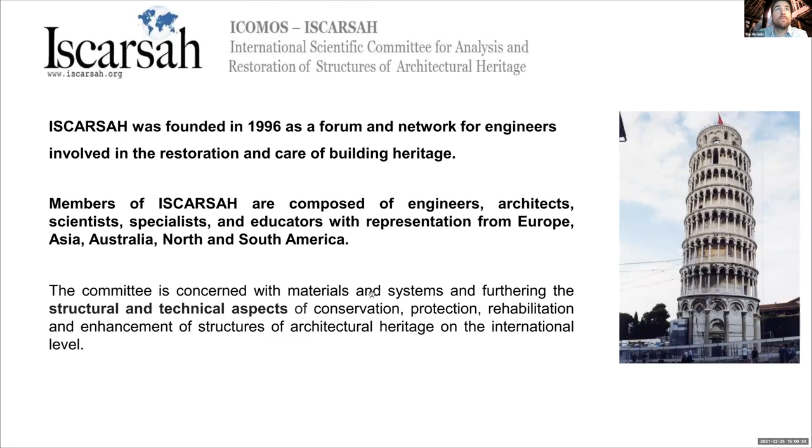We are an international group of engineers, architects, scientists, and educators dedicated to the restoration and care of built heritage. We mostly focus on the structural and technical aspects of conservation and architectural heritage. We have an elected board, many of whom are here with us today.

Our president, Gorun Arun, will be our first speaker. Our Secretary General, Tom Morrison, is as always working hard behind the scenes, letting people into the meeting room, monitoring the chat, and so on.

In the past years, ISCARSAH has published principles for the analysis, conservation, and structural restoration of architectural heritage. We publish newsletters as well. Currently, we are developing guidelines for the analysis and restoration of structures of architectural heritage.

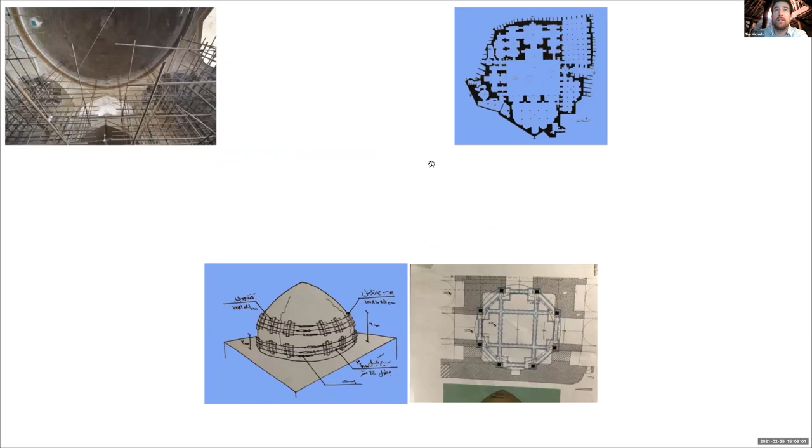And before the pandemic, we were organizing yearly workshops. The latest ones were in Korea, like this one, and Turkey. Here's some pictures of that workshop. And then the very last one was in October 2018 and was held in Iran. We look forward to continuing this once the pandemic is over.

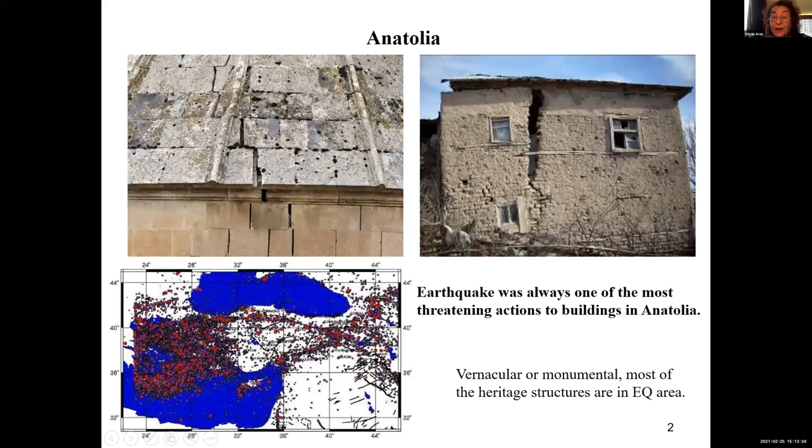Earthquake was and still is one of the most threatening actions to buildings in Anatolia. As you see here, vernacular or monumental, most of the heritage structures are in an earthquake area. In Anatolia, the main construction technology until the mid-20th century was timber and masonry. Above you see different types of timber structures, and below different types of masonry structures. In most places, due to scarcity of wood, masonry structures were built, and most historical heritage surviving to date is masonry construction.

The master builders of the past, when designing their buildings, were responsible for every aspect. They had to assume the roles of architect, civil and structural engineer, mechanical engineer, as well as city planner and contractor.

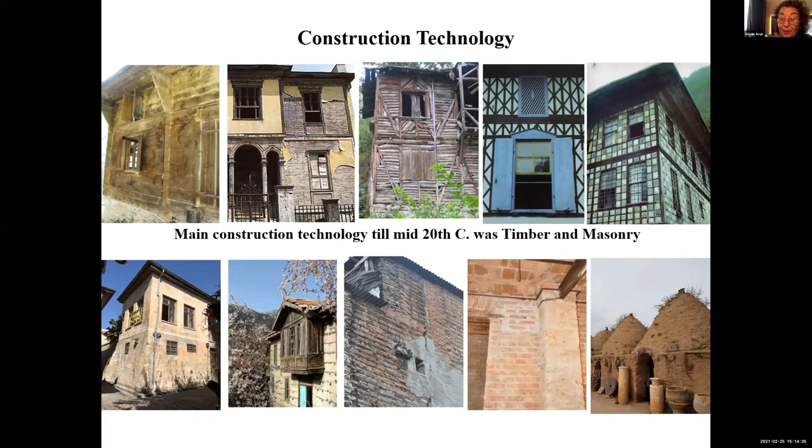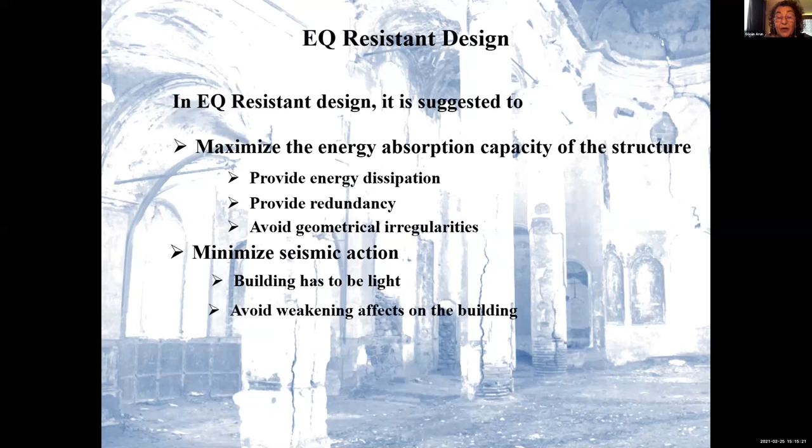Today we say earthquake resistant design is necessary to make a building safe. In earthquake resistant design, it is suggested to maximize the energy absorption capacity of the structure and minimize seismic action. To maximize energy absorption, energy dissipation has to be provided, redundancy has to be provided, and geometrical irregularities must be avoided. To minimize seismic action, the building has to be light, weakening effects must be avoided, and amplification of ground acceleration has to be minimized.

Building masters used techniques developed from previous cultures, their own trial and error, and techniques transferred from one generation to another. They were able to size and design their buildings, taking proper account of environmental conditions. Let's see how these demands are met by our master builders.

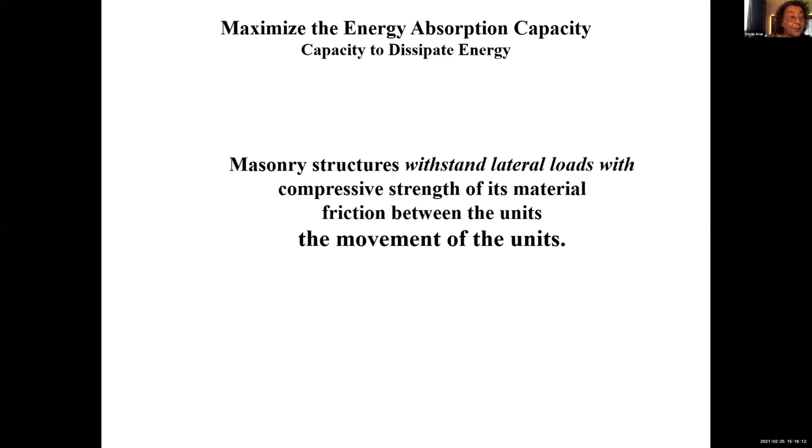To dissipate energy, masonry structures withstand lateral loads through the compressive strength of their material, friction between units, and the movement of units. The movement of units is important to disperse energy. In connecting stone units with each other, builders placed metal connectors in lead, a very soft material, so that it lets the units move under lateral loads to disperse energy.

If they used mortar to connect the units, they used weak rather than strong mortar, so that the units could slide along the bed joints under lateral loads and dissipate energy. Repair of the mortar is not so hard, but it keeps the main structural units intact.

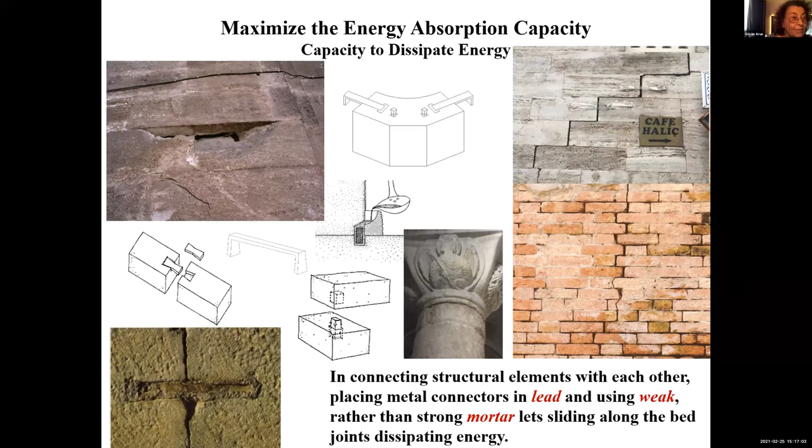Redundancy has to be provided. Redundancy of the structure depends on the nature of the structural system and the detailing of its elements. But masonry structures are inherently redundant structures.

Building masters knew that the physical dimensions of height-to-thickness ratio and length-to-thickness ratio of a wall are important factors in the seismic performance of masonry walls. They provided horizontal lacings that tied the outer faces of the walls. This prevents wall bulging under gravity loads and reduces the slenderness ratio of the wall. These lacings could be brick and stone, or metal in stone walls, and timber in brick, stone, or other walls.

They provided vertical supports at certain intervals along long walls. These could be cross walls and intersecting walls, or vertical ties of timber or stone buttresses.

To avoid geometrical irregularities, such as long projecting and differently weighted components of a building, buildings were separated by seismic joints. The building parts standing side by side were separated by not joining the masonry units to each other, and the foundations were also separated.

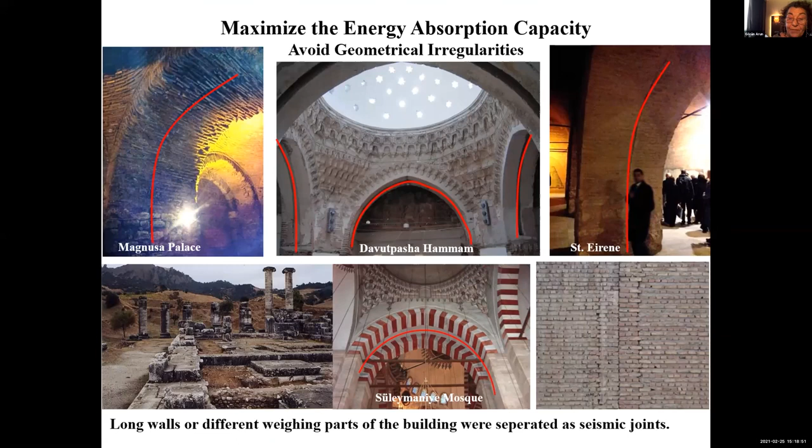To minimize earthquake effect, building has to be light. But masonry is heavy construction. The only way to reduce the weight of the structure was to make light roof and floors. In places where there's no wood, masonry walls and domes were built to span the plan areas. The building masters, knowing the geometry and behavior of the walls and domes, used clay pipes in the area of compression to reduce the weight.

To construct a flat roof over these domes or walls, between the flat roof or floor and the wall, they emptied the space in between or used clay pipes or amphora to reduce the weight of the building.

Again, to make the building lighter, in multi-story buildings in seismic areas, structures were constructed getting gradually lighter at the upper floors, both with material and the thickness of the wall. For example, in this 3-floor building, the ground floor is masonry, the first floor is timber with brick infill.

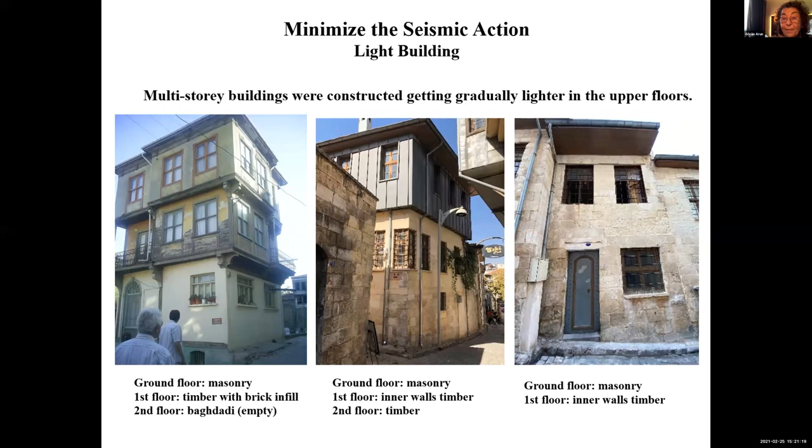To avoid weakening effects, water is a non-seismic threat to all kinds of buildings, timber or masonry. Depending on the porosity of the foundation construction material and soil characteristics, it can damage the wall and soil, eroding away portions and reducing the strength. Moisture in a building causes loss of material and weakens the structure in the long term. So water drainage was given high priority during design and construction.

To prevent instability of the building from underground water movement seasonally or daily, and to collect the surface water of rainfall, they designed an effective drainage system. The major components of this drainage system were wells or cisterns in the basement of the building, galleries or channels to discharge the water out of the building, and gates for ventilation.

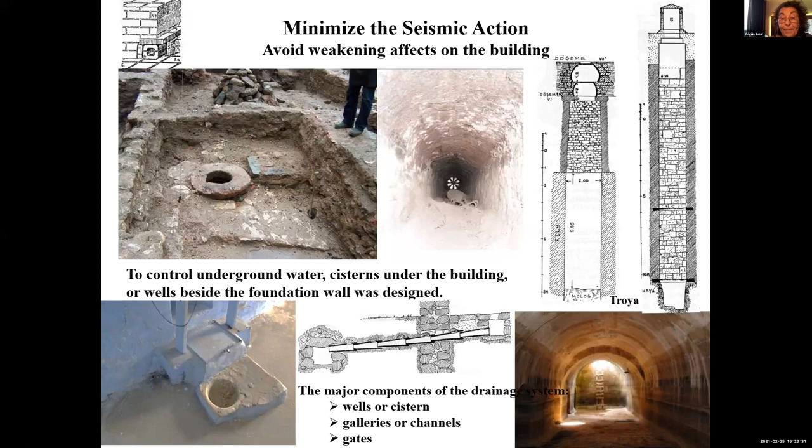Because this application is forgotten, when a new construction has to be built beside an old masonry or timber construction, it breaks the discharging system. Then the water starts to race to the building, weakening the material and softening the soil, which leads to the foundation settlement of the building.

To minimize amplification of ground acceleration, it has to do with the design of the foundation. Usually, the soft soil was consolidated by timber piles. The timber piles were tied by a timber mesh embedded in porous mortar. The foundation walls rested on this platform.

The foundations of masonry or timber buildings were of masonry. The thick foundations were generally a vertical wall in the soil. As the wall thicknesses became thinner, the foundation walls widened at the foot. If the wall was composed of closely spaced piers, and there was no sufficient depth to step the foundation, an inverted arch or vault was made.

Master builders knew that the acceleration generated by ground displacement is amplified or attenuated by soil structure. In high seismic zones, the building masters introduced special techniques in foundation construction to provide lateral stability.

If the rock bed or hard soil was deep, the foundation walls rested on a low layer of sand, gravel, or small stones. In masonry village houses in Anatolia, foundations were constructed over a layer of approximately 40 centimeters of sand until the 1960s, when reinforced concrete became popular in villages also.

If the rock bed was close to the surface, a flexible base was provided by placing single or more layers of wood foundation at the foundation base.

The foundation walls of the buildings in Üsküdar, you see, rest on grillage. Here, in the project of the inverted vault foundation of Edirne Kapı Cistern from the 19th century, you can see the timber grillage at the bottom. This foundation rests on 2 layers of timber grillage.

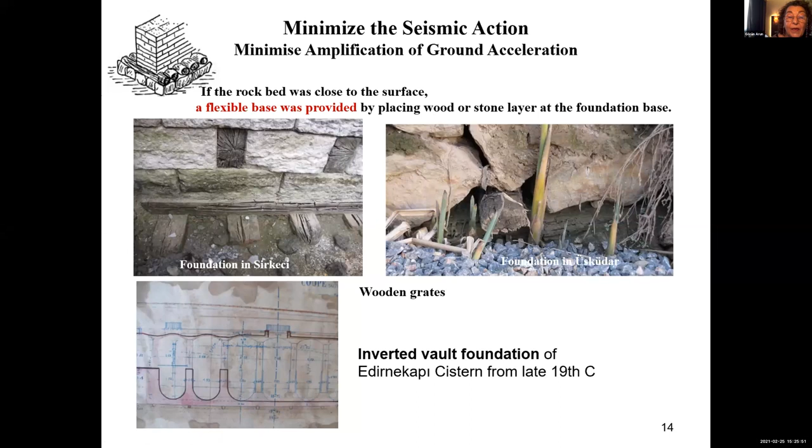If the rock bed was on the surface, the rock was carved in the form of a trough so that each stone of the foundation wall could be placed in the rock as if resting in a cradle. The big dressed stones of the wall rested on the high edges of the trough, not inside. The space in between was filled with briar, pieces of coal, or animal skin to reduce friction.

At the bottom, you see Malabadi Bridge in southeast Turkey. The piers of Malabadi Bridge rest on a lead layer.

A different foundation system practice was found during the octagonal tomb. Around this octagonal tomb, a 6 meter high, 2 meter thick wall at a 4 meter distance to the tomb was found, and it was in the shape of an octagon. This is because octagonal and hexagonal forms are not adequate forms for earthquake areas. So this buried wall acted as a retaining wall to absorb the first shock of earthquake forces, and there is no damage in this octagonal tomb.

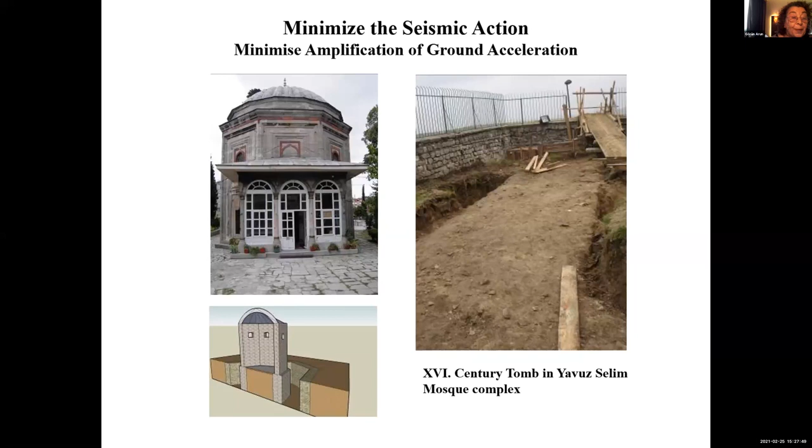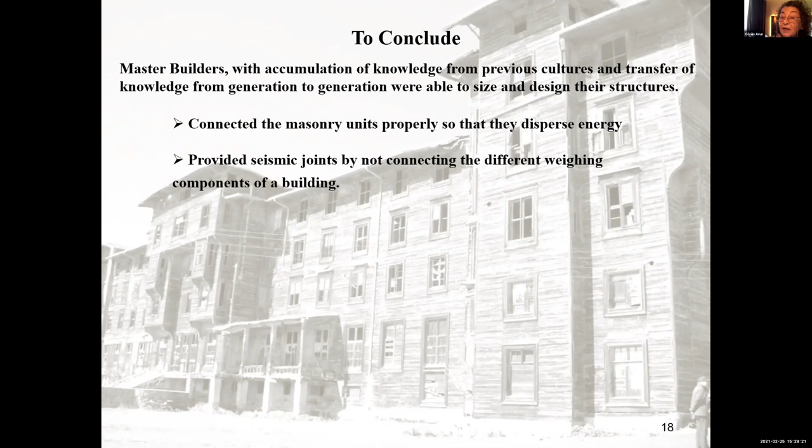To conclude, from previous cultures, their trial and error and transfer of knowledge from generation to generation were able to size and design their structures. They connected masonry units properly so that they disperse energy, provided seismic joints but by not connecting the different weighing components of a building. They had knowledge of geometry and behavior of structural elements. They used lighter construction material on upper floors to hold the center of gravity of the building close to grade. They designed an effective underground and surface water drainage system. In earthquake areas, they changed the natural frequency of soil or provided a flexible base.

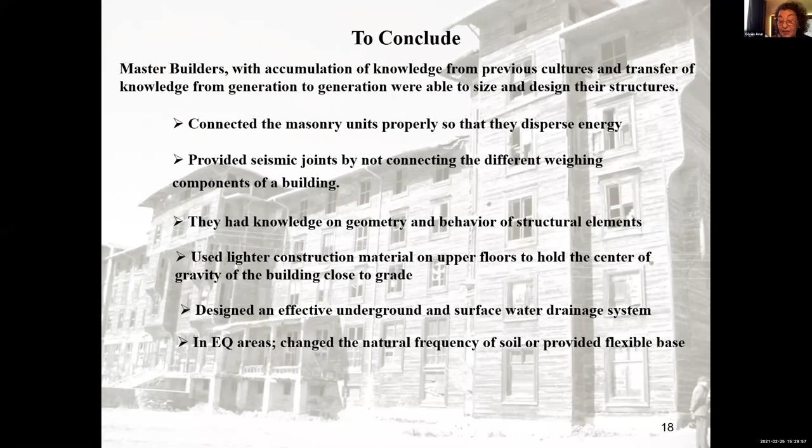Just a very short introduction to the earthquakes that take place along the Himalayas and the ones that have affected the Kathmandu Valley. The most recent one was the 2015 Gorkha earthquake, which was 7.8 magnitude. Previously, we had the 1934 Nepal-Bihar earthquake of 8.4 magnitude. So we see that every 80 to 100 years, we have a large earthquake impacting the Kathmandu Valley.

The case study is this Kasthamandap, which you see an image on the left, which did not collapse during the 8.4 magnitude 1934 Great Bihar Nepal earthquake. There were major restorations that took place in 1966, followed by repairs in 1972 and 84, and probably in between several other repairs and work were carried out to this monument. But the Kasthamandap collapsed during the recent 2015 Gorkha earthquake of magnitude 7.8. So the question is, why did it collapse during this earthquake, and why did it actually survive the previous earthquake? This has been one of the big questions that keep arising, and we're still struggling to understand, to try to deal with this question.

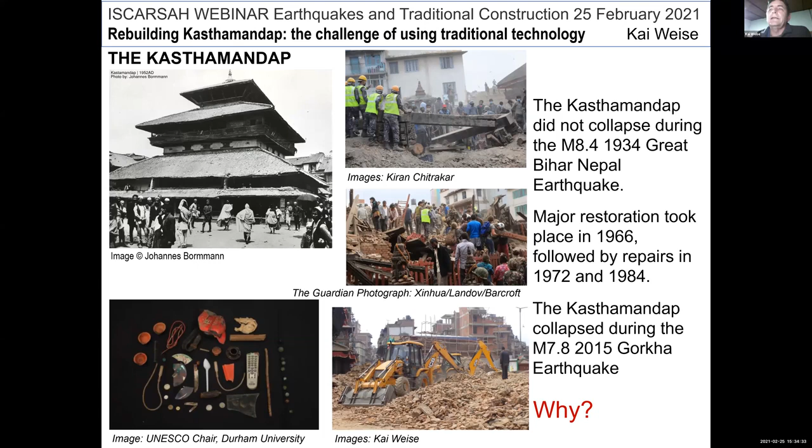The sad situation was that when it collapsed, there was a blood donation going on, and quite a lot of people died. So it was a very traumatic experience. The Kasthamandap is a pavilion, a timber pavilion, but we also have a bit of brickwork around the core, which complicates the entire structure, trying to understand its structural character.

The importance of this structure is that it gave Kathmandu its name. Kasthamandap is the timber structure, or monument, or pavilion, and the city was named after this monument. So it, of course, has major significance, and once it collapsed, it became quite a politicized issue.

The initial structural assessment and the original design came up with a whole series of recommendations, which are very standard recommendations made for all our monuments in the Kathmandu Valley. The roofs have a thick layer of mud, which the tiles are stuck into.

The question was that the roof was too heavy and we needed to reduce the load. Another point is that there wasn't sufficient stiffness, and the traditional monuments don't have any diagonal bracing, not even on the floor. So the question was how to introduce this diagonal bracing to provide a certain stiffness to the building.

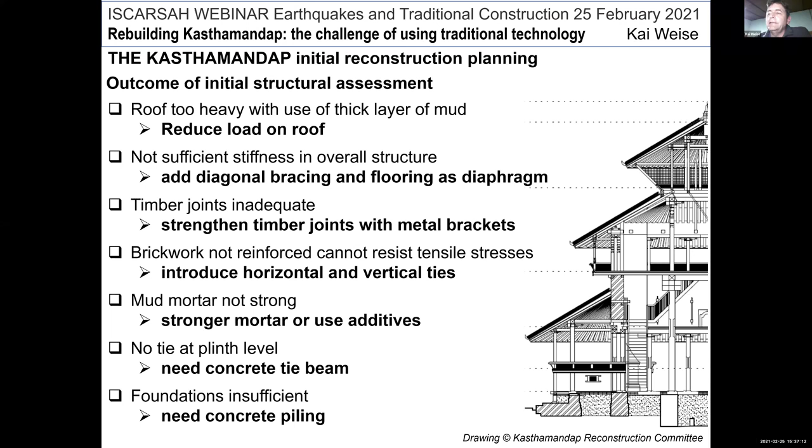The question also arose of having some kind of plinth-level tie beam, which the suggestion was to use concrete. And the question of the foundations not being sufficient meant we needed some kind of micropiling done. However, all these suggestions were not accepted.

This activist-led community protest wanted the monument rebuilt as it was. The question, of course, arises what that means, but the point was that they did not want these foreign interventions introduced to this monument. And this actually led to the reconstruction being halted for three years.

Only in 2018 could we actually begin the reconstruction, taking into account that we needed to rebuild it as it was. That, of course, brought up a lot of questions. During these three years, we were actually able to do a lot of research, which was good in a certain sense.

Archaeologists from Durham University excavated into the foundations, and we found that the brick and mud mortar foundations were in perfect condition. However, a lot of the timber joints and timber had deteriorated, especially the link between the main timber posts.

In this image, one sees the keystones where the main four posts were supported, and one of the four stones was actually missing. So probably at some point, the deteriorated timber was cut at the bottom, and the flooring was shoved underneath one of the four main central posts, meaning the structure was actually standing on only three of its main central posts.

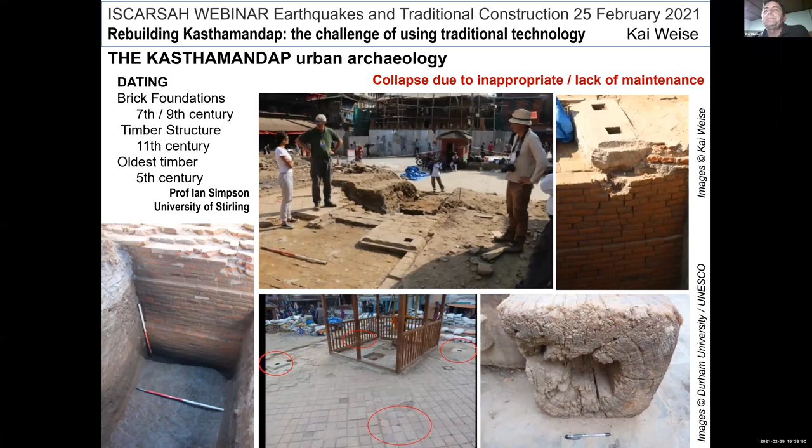Starting with the foundation and the brickwork, we found there was a specific scale to the bricks, their size, and also that the smaller foundations were 8 courses in 3 levels, while the deeper foundations were 12 courses each in 3 levels. This meant all the proportions had to be considered when we started reconstruction, including ordering bricks of the specific size required.

We had to develop an understanding of the brickwork and mortar to use in this monument. Already at the beginning, when we removed the rubble, we saw that the plinth was wavy, which suggested some kind of settlement. But looking more specifically, we realized there wasn't any settlement at all.

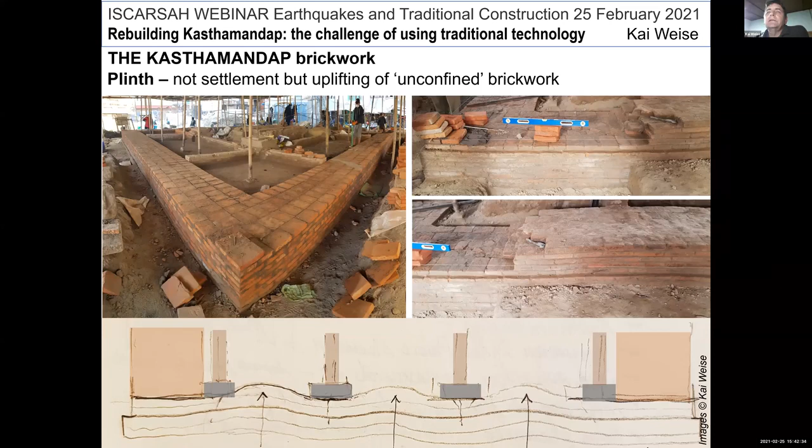We had to remove about four or five courses and relay the plinth to bring it to a proper level. The other big issue was getting artisans who could work with timber, which was the main part of this structure. Luckily, we have the artisans. To some degree we could reuse the timber elements, but a lot of it we had to replace, or use the old timber and reuse it. Luckily, with the knowledge of the artisans, it was possible to carry out this work.

On the right we see the bamboo scaffolding. It looks very traditional and looked very good, but it was also very practical because it was much more flexible than using pipe trusses. To pull up the timber elements, it was possible to do it by hand, using ropes and human power instead of heavy machinery, which allowed the communities to participate in the process and help carry these timber elements to the site.

With the timber, I was told there are over 150 different joints. We still need to do further research on this. Supposedly a lot of these traditional joints have already been forgotten. We're hoping to get the artisans that are still around to help us document these joints. The main characteristic is that it's fully timber joint, where pegs hold the different pieces together.

The problem we faced was with the brickwork, where in the foundations we found the brickwork in perfect condition, but in the superstructure there was a lot of damage, possibly even before the earthquake, but after the collapse there was additional damage to the brickwork. There was a lot of discussion on how to deal with this.

The question was how to ensure that the brick components of the monument were better reinforced. This was a big discussion, and I discussed this with many people, including Arun Menon and also Randolph. I spent many hours discussing with him - hopefully he's also listening in on this, because I've used his images.

Traditional monuments in Kathmandu actually have horizontal timber lacing, but very often they don't use vertical elements, so it's really just horizontal timber lacing holding the structure together. On the other hand, similar to the construction in Kashmir - the Taq construction - there's the other possibility of timber framing, found in many parts of the world and in Kashmir, but this is not used very often in Kathmandu.

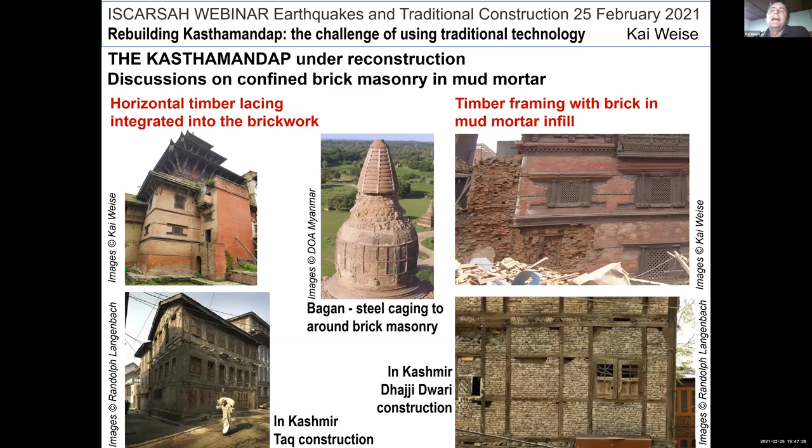What we ended up doing in the Kasthamandap was introducing a very minimum timber reinforcement into the brickwork, to ensure some form of confinement, but keeping it to a minimum so it doesn't take over the function of a timber framing with infill. This was to ensure that the brickwork is able to take on a certain level of stress.

This is the present status of the Kasthamandap. We're just about completed the main structure. We're still waiting for timber to be provided for the remaining roof structure.

What we're working on is also a continuity plan, since we know one of the main causes for the collapse was the lack of maintenance and the requirement of managing the structure over time. We are working on a continuity plan, which includes the maintenance and monitoring of the structure.

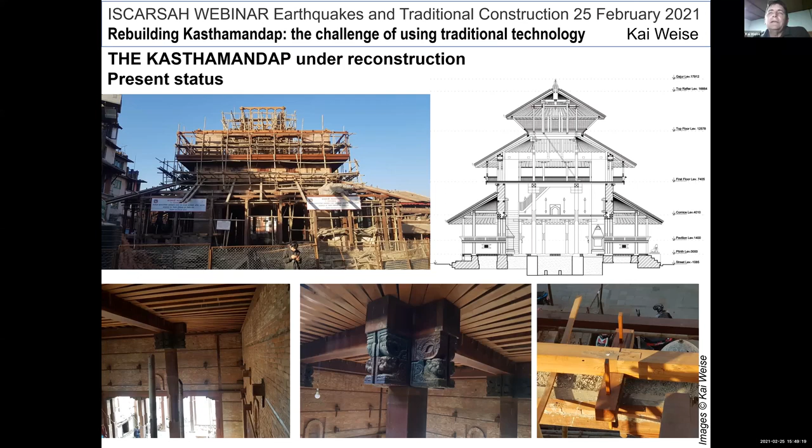We're hoping to put in sensors as well and do structural monitoring, but also manage the use of the monument. The continuity also includes, here on the lower image, one of the brackets, which is actually from the 5th century. So there's a continuity also in respect to material.

As a conclusion, it's always this question of how do we deal with traditional technology and materials, and bringing in the scientist. Here is Professor Ian Simpson from Stirling University taking a sample of the timber while our head carpenter watches. He looks very skeptical, but on the right side we've managed to get him to try out the resistometer.

Traditionally, of course, you just knock on the wood and you know whether it's good or not just by listening to it. But again, the question is how do we bring this traditional knowledge and modern technology to communicate with each other to be able to deal with these monuments?

We're actually planning our inauguration on the 25th of April this year. It would be 6 years after the earthquake and 3 years after we started construction, but we're not quite sure whether we'll manage to complete it by then. We're still hoping to do so.

Thank you very much.

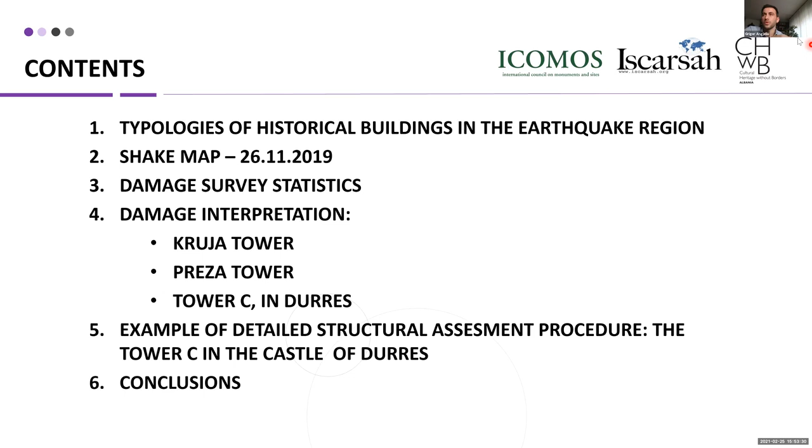Because of the big audience here from all over the world, Albania is located in the Balkan region, just beside Italy and Greece, so it's a territory characterized by moderate seismic events.

It is important also to see what are the types of buildings that we have in the region of the earthquake. There are different types of buildings.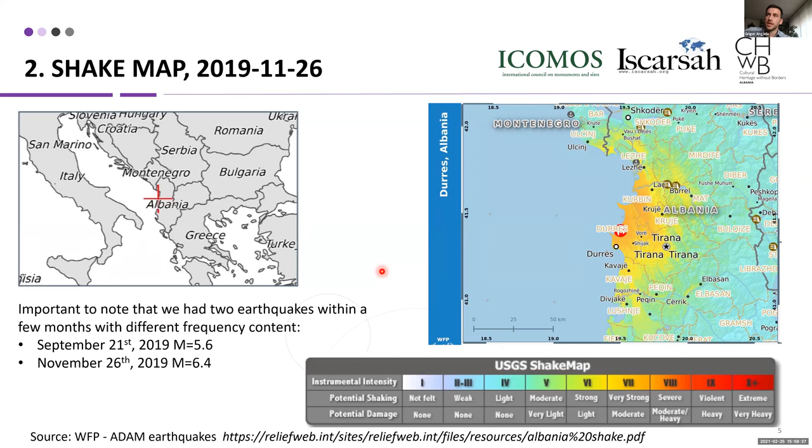Here you can note the 3 regions of the earthquake. This is the epicenter. And these are some data collected by the National Institute of Cultural Heritage on a stock of 110 designated buildings.

So on a stock of 110 designated buildings, 10% was previously damaged, and then we had more or less 40% with negligible damage, 25-26% with moderate damage, and more or less 22-23% with very severe damage. So this is on the stock of 110 buildings.

It's very interesting to see because from that point we can also generalize about the damage that the earthquake caused to buildings in the country. So these were some general statistics about the earthquake.

I think it's good for us now to focus on some of the cases. I have chosen 3 cases belonging to the same structural typology, towers, because I think these are the 3 most significant ones, but also easily to understand and to make comparisons between them.

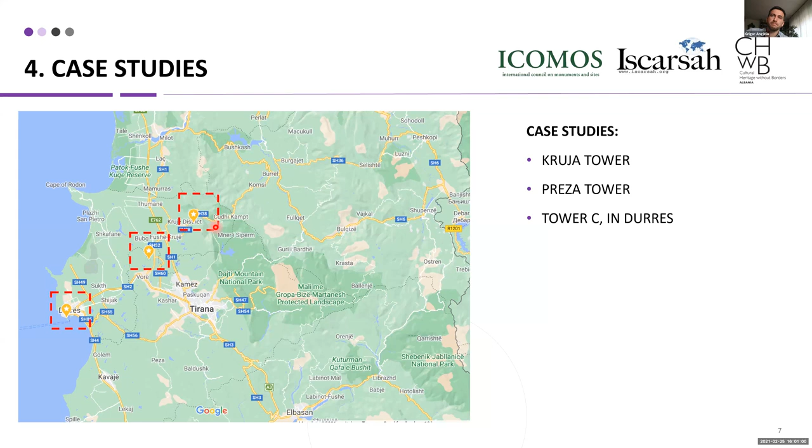This is the Tower of Preza. You can see on the left an image of the tower before the damage, from 2013. And on the right, an image after the damage of 2019. The complete upper part of the tower had collapsed.

It's very important in this example to see the presence of pre-existing cracks. You can see clearly here—I did not try to highlight anything because in my opinion it's pretty evident—the presence of the cracks already in 2013. The same cracks, of course, got magnified after the earthquake, but it looks like they were an important factor in the collapse.

Something very interesting here was an addition, recently, but more or less like 2 years before the collapse. You can see that the lower part of the construction, which had the insertion of some steel ties, resisted pretty well.

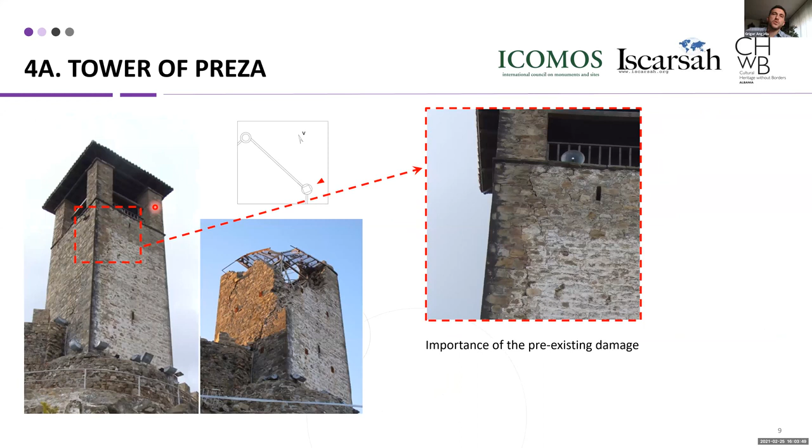Of course, this is a much bigger tower compared to the previous one. But again, beside the specifics of each case, I would like to draw here a comparison between the first and this one, in the sense that the part of the colonnade in the upper part, in this case, did not collapse, if you make a comparison between this one and this other one.

And the reason was because this one here was basically rebuilt in concrete during the 70s or 80s, more or less. And in the zoomed part of this, you can see here the reinforced concrete beam on the base of it, which basically during the earthquake more or less floated in this soft layer of mortar. So it's some kind of base isolation at the end.

But another important aspect here is to make a comparison between this facade and this other one. So this part of the facade and this other one. The importance is in the fact that in this part of the facade, the damage was more or less pretty limited. But on this one, you see that the damage is pretty important.

So if we analyze then more in detail the part of the technology of construction, you can see clearly here that we have timber ties more or less placed regularly, one every meter or a meter and a half. So these are the two edges of the tower, basically. And it is demonstrated here quite easily that this traditional technology of timber ties is a good one in helping to prevent seismic damage. Of course, there is some damage, but it's much more limited compared to the other facade of the building.

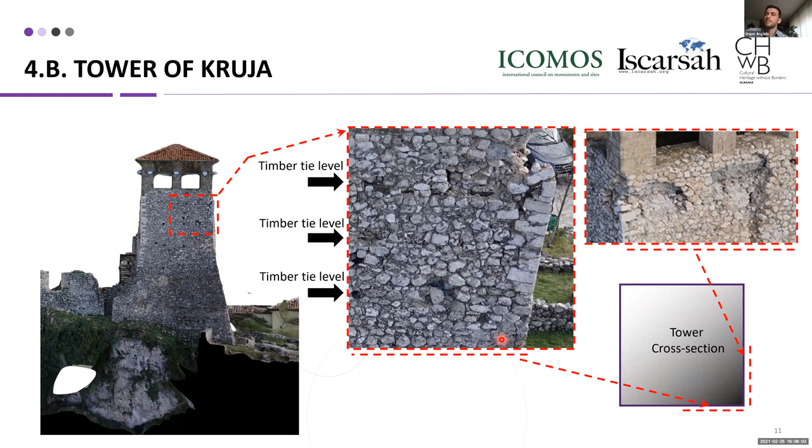This is another example of another tower. This is in the city of Durrës. So also here we have a local collapse, so a big portion of one of the towers, this is tower C, collapsed.

What is very interesting in this case is that we have also two other towers with the same geometry, just let's say like 20 meters from this side and 20 meters from the other side. And the two of them did not collapse, but just this one has this local collapse.

I would now show in detail some of the structure assessment procedure that we performed in this case in order to analyze this case study. I think that would be also interesting for the audience.

This part is divided mainly in two parts. One is the data collection and analysis, and then is the structure analysis procedure. The idea behind all of this is to have, let's say, certain scientific proof on the causes of the collapse. And this, of course, will help in the restoration approach.

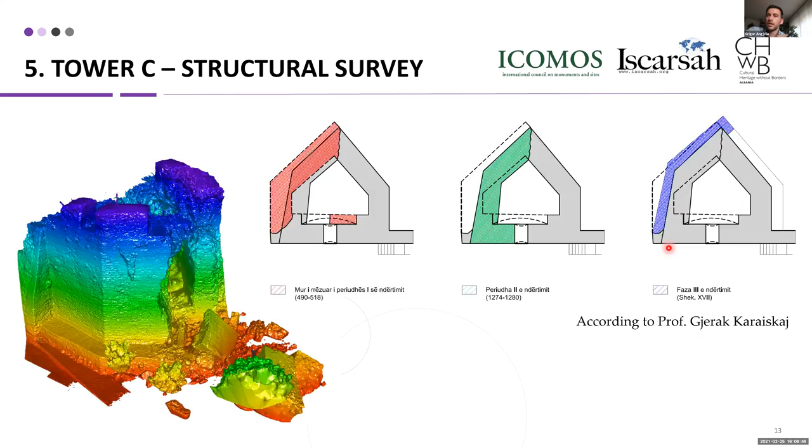This is the geometry of the tower. During the structure survey, we noted some weaknesses in the tower. First of all, this is the block which collapsed, a huge one actually. And we noted the first weak plane, which is this one here.

There was a second weak plane, also pretty much flat, connected with one of the phases of construction. But another very interesting discovery was this cavity, this void at the base of this activated block. So we had to be certain which was the main cause of this collapse.

Finally, we performed analysis on materials, and in conclusion, the mechanical properties here were pretty good.

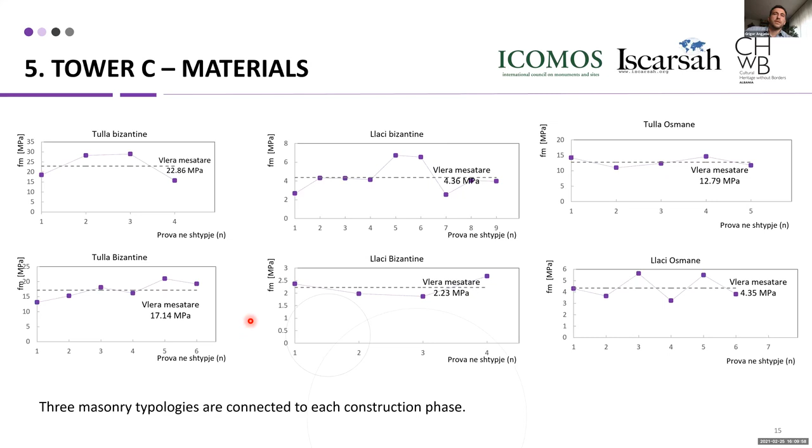Another part we discussed was the seismic action. These are some accelerograms which we recorded in the city of Durrës. This was recorded from the Durrës station, but unfortunately we have just 15 seconds of the registration, so all the calculations are performed just with these numbers.

With regards to the spectral acceleration, it was very interesting in this case to make a comparison between the earthquake spectrum and the one suggested by the design code. It was noted that the spectrum of the earthquake was more or less what was suggested by the design code, confirming the strongness of the earthquake.

Here you can see, in more detail, a comparison between the one in blue and the one in black, between the earthquake of November 26th and the one of September 21st. So we had two quite strong earthquakes, although the first one was not felt that much and did not have that much damage compared to the second.

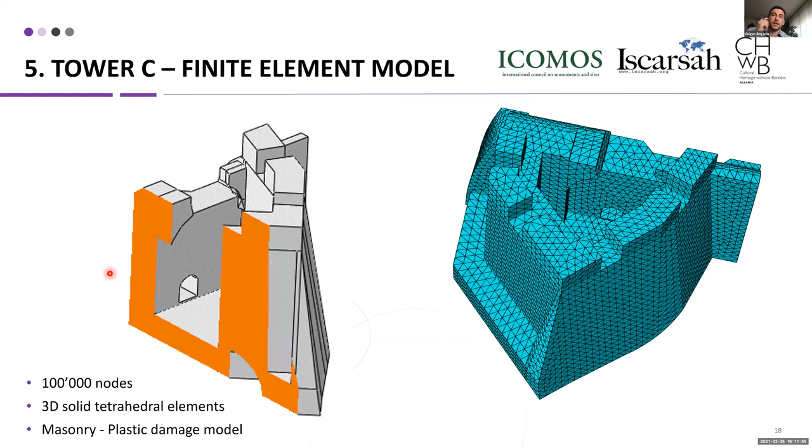Here we can see a finite element model of the tower, in order to study in much more detail and assure the causes of the collapse. This is the modal analysis. It was interesting to observe some similarity between the collapse and some of the modes in the numerical model.

We analyzed the effect of soil settlements, and what came out was that one of the major cracks, one of the important weak planes we saw, could have been related very strongly to soil settlements. So in some way, this excluded the first weak plane as one of the causes of the collapse.

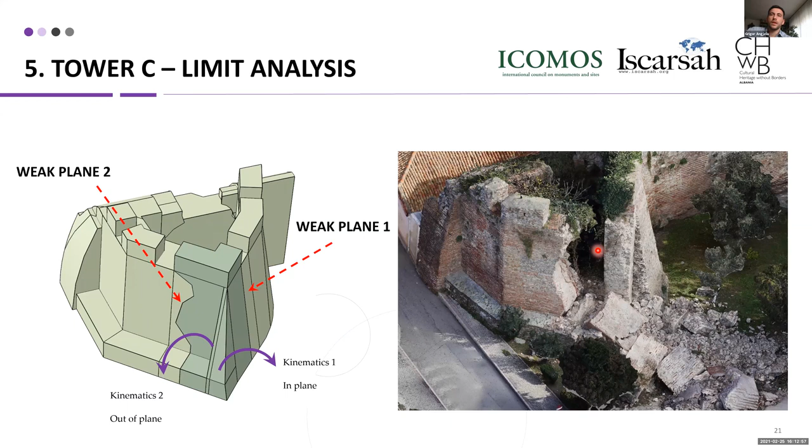In order to have a more simple analysis, we also performed limit analysis here. The result of this analysis showed these kinematic multipliers, and the results showed that the failure in this direction would have been, let's say, the first one.

This highlighted that the surface here, which was very flat and did not provide any friction, would have been one of the major causes of the collapse. While the weak plane here could not have been the major one for the collapse, because if we calculate the multiplier with the friction, the safety would have been pretty high.

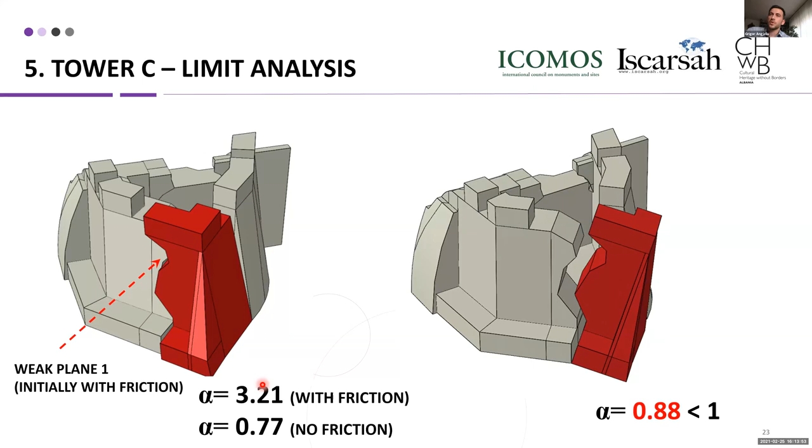In order to give the final assurance on the collapse, we performed time history analysis with the actual accelerogram, and you can see that at a simulation time of more or less 12 seconds, the formation of damage begins in this area, close to the construction joint, where we have a very flat surface in the masonry, so no friction to guarantee the continuity of the structure.

Then after some time, we see the development of damage close to where we have the cavity in the model. So at the end, this confirmed that the damage arises first at the point of the construction joint, and then develops through the part of the cavity, confirming these two points as the most important factors causing the collapse.

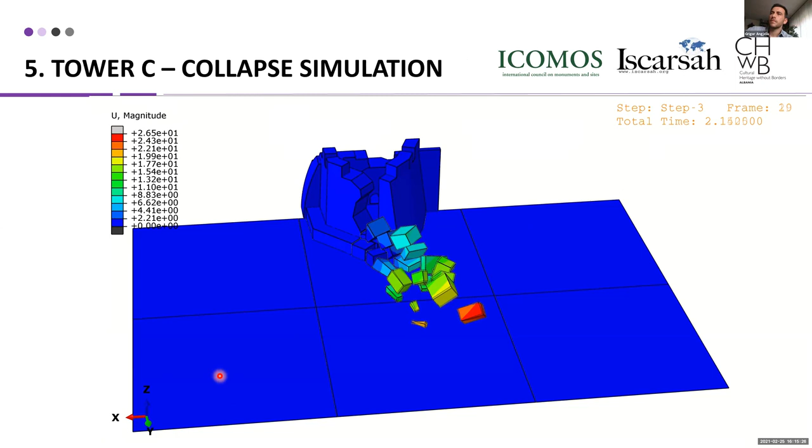So this is one last simulation to show how the collapse happened, and you can make a comparison with the actual mechanism. This is also important in order to understand the kinematics of the collapse for the later reconstruction.

So with this, I conclude case study number 3. Let me conclude with these remarks regarding the seismic events in Albania. First of all, it is important to state that we had two seismic events within a short time frame, which did not allow time for a proper survey and repair of the buildings.

Regarding the restoration strategy, the original anti-seismic system in these buildings is mainly made of timber ties, placed every 1 or 1.5 meters. Most of these elements are partially or completely degraded in these buildings. But since, as we saw for example in the Tower of Kuria, it proved successful, it is suggested first of all to restore the original anti-seismic system, where possible, because there are also technical difficulties, and then to propose new strengthening strategies.

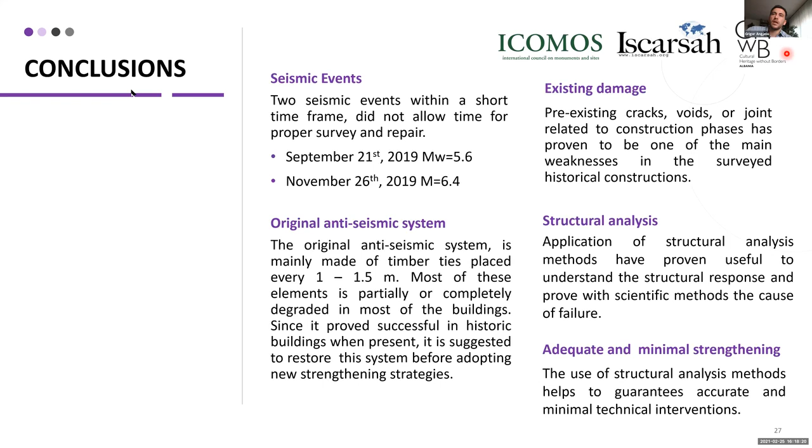Finally, let me conclude here with an acknowledgement to Cultural Heritage Without Borders and the team, Leila, Nedi, Stavri, Anna, Anissa, and Yora, who were part of this amazing research. Thank you for your attention.

So the title of my presentation this evening is Seismic Resistant Traditional Construction Features and Structural Systems in the Indian Subcontinent. To begin with, just to give you an overview of seismic resistant traditional constructions in India, it's important to understand the extent of seismicity, the regions of seismicity from the point of view of severity and frequency of occurrence of earthquakes.

In that context, it's important to talk of the Alpine Himalayan belt, which has been a region of development of a very large number of local seismic cultures, or LSCs as we refer to them today. This extends all the way from Myanmar to the Alps in southern Europe. So you have different forms of earthquake-resistant traditional constructions that have developed over time, well documented, well understood, well researched in different parts of the country. And I think the effort to protect them is an area which requires focus.

As far as India is concerned, you have the interplate events, at the boundary of two tectonic plates, and that's the Himalayan region, where you have the large earthquakes, and they're rather frequent as well in this region. So constructions such as the Dhajji Dewari construction in Kashmir, the Taq construction in Kashmir, the Kath Kuni construction in Himachal, are all located along the plate boundary and therefore subjected to interplate type large frequent earthquakes. But you also have the Assam type of construction, in the same region, closer to Assam and regions around it like Sikkim, called the Ekra construction.

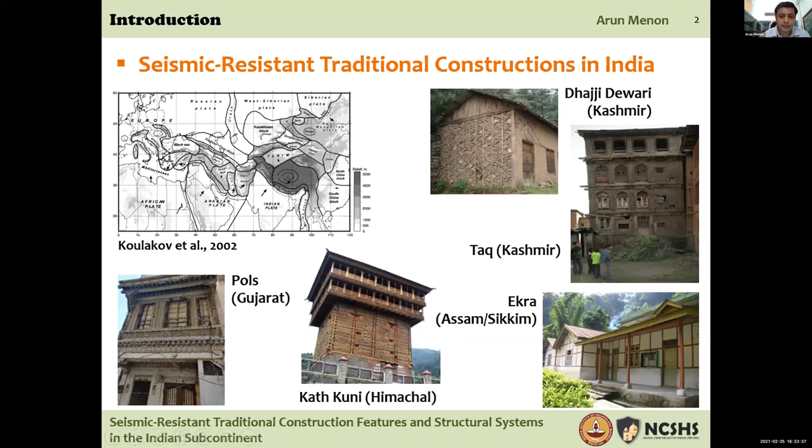It is therefore interesting to always try to take lessons and learn from regions where there has been significant earthquake activity, learn lessons from important large earthquakes. Every earthquake has something to offer in the broad canvas of knowledge that develops over time. It's interesting to look at regions, particularly in a country like India, where you have regions of high seismicity and regions of such low seismicity that people have never heard of earthquakes in certain zones.

So we had this opportunity of studying some of the stone constructions—trabeate, post and lintel stone constructions—in South India, the peninsular region, where earthquakes are almost unheard of. We've not had an important earthquake in at least 500 years. It's interesting to look at the hypostyle halls, multi-pillared stone constructions, and understand what gives them safety against earthquake forces, and how well they would perform in a surprise event, in a maximum considered earthquake for the region.

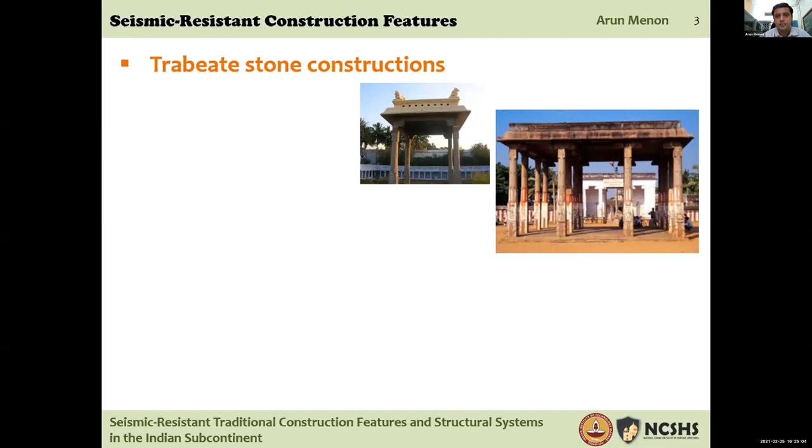So we were at a point in time examining the earthquake safety of such constructions. You see a 4-pillared construction and a 16-pillared construction, and examining this, considering this is a low seismic zone, looking at the code-defined levels of earthquakes to understand how these would perform compared to the prescribed levels in the seismic codes. Given that these are stone constructions, we're really looking at monolithic elements—beams and columns—and so limit analysis gives us good insight into the performance of these rigid blocks.

It's interesting to note that these constructions have no interlocking between the monolithic elements—they're devoid of any sort of positive connections. They do have a slight rough edge, marking where they should be seated with each other, but this is more for alignment purposes during construction, not to provide resistance to lateral actions. So you can assume the positive interconnections are absent in these constructions.

It's actually interesting to note that some of these constructions can be vulnerable to levels of earthquake shaking which South India has not experienced for at least 500 years from recorded history. So with no positive connections between these posts and lintels, they appear from limit analysis to be vulnerable to overturning effects. Of course there is a certain role because of frictional resistance that it depends on—there is a role of pre-compression which is extremely critical. That's the sort of understanding we would have.

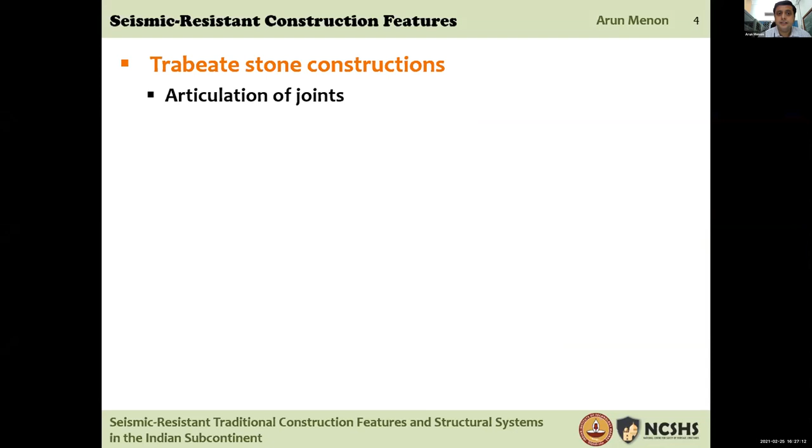But then moving on to regions within India where there is significant earthquake activity, it's interesting to see the articulation of joints. One starts understanding the necessity of those features in the construction and the importance of retaining them in any reconstruction or rehabilitation effort. The focus is particularly on articulation of joints. As I said, the absence of seismic resistant features is what made us look at the South Indian constructions in regions of low seismicity, to see what is expected to happen.

However, you should also understand that the absence of seismic resistant features in constructions can be considered evidence of a region's seismicity level. That is a sort of confirmation of historical earthquake catalogs, if you want.

But if you then look at regions of significant earthquake activity—parts of India, and particularly Nepal—you see the incorporation of specific features such as tenon and mortise joints and shear interlocking, which is rather significant. These shear keys, rather significant in dimension, give you an understanding of the critical role they play in protecting the construction.

However, in this particular case, you do see collapse of structures despite having such features. That is possibly due to two reasons: one, the large amplitude of displacement is what causes shearing off damage to stone shear keys, or in the case of timber, deterioration of the timber would mean it really does not have adequate interlocking in the event of an earthquake.

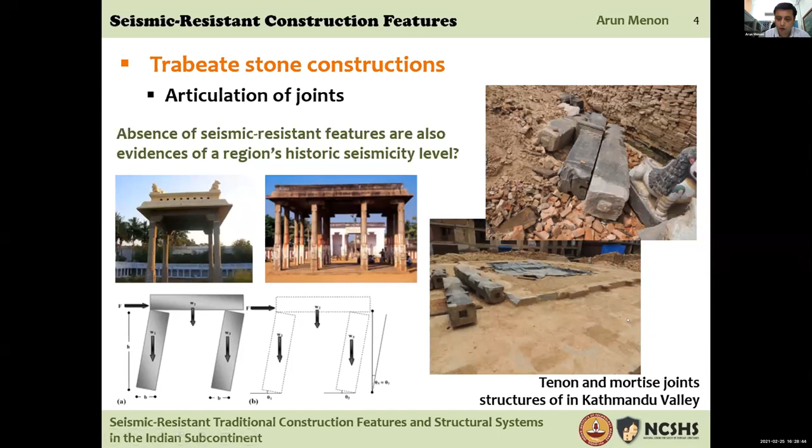Looking again at regions where earthquake activity is significant in India, looking at Gujarat, as regards the Bhuj earthquake, we see evidence of use of dowels in iron and wood. This is a picture of an archaeological monument that underwent partial collapse in the 2001 Bhuj earthquake. Looking at the construction of the minaret walls, two adjacent blocks of stone masonry are provided with interconnection, with depressions into which timber or wood dowels could be embedded.

However, over time there is deterioration of the lime because of the action of water and moisture. Once the lime is lost, you have the bare wooden dowel exposed to the elements, and over time the wooden dowel completely disappears. Then you're left with just a pack of stones seated together, without the deformation capacity that this detail was providing.

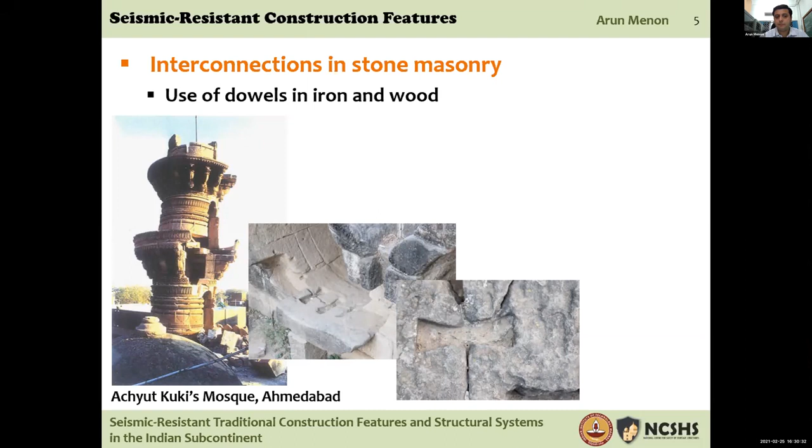So in reconstruction efforts, particularly after an earthquake in historical monuments of this nature, it's very important to identify the role of such interventions and replicate them, or see if they can be replaced with something conducive to the overall characteristic of the construction.

If we examine higher seismic regions like Himachal Pradesh, again in the Himalayan range - Kangra, a region of a massive earthquake in 1905 - you can see constructions make use of iron doweling, again from the point of view of providing deformation capacity. But corrosion in metal, unless protected, in some cases embedded in lead but not all, would lead to damage in the stone itself.

Moving on to specific examples of traditional construction in high seismic zones, the timber-laced masonry construction of the Taq in Kashmir is one of the most important, categorized as timber-laced masonry - and you'll appreciate in a moment why it is so.

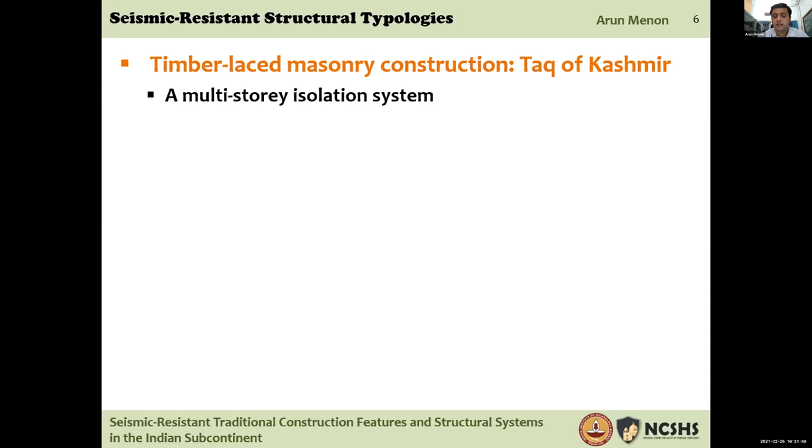If one examines the architectural typology, you might think this is a sort of multi-story isolation system, because the Taq constructions of Kashmir are really buildings about 3 to 4 stories in height.

The Taq constructions have a random rubble masonry foundation over which there's a wooden plinth band - a runner that goes all around, sitting at the two edges of the stone masonry plinth wall. The brick construction then commences atop these timber bands.

What's interesting is the construction makes use of a floor band and a ceiling band, with the floor joist supported between these two bands. So you have a floor band, a ceiling band, and another floor band, and the timber joist supporting the floor is embedded between the ceiling band and the floor band.

So you can see how the load transfer happens directly to the timber system in the floor, and the walls are interrupted by this lacing in timber. This continues for several floors, and then there's a roof system, again in timber, supported on the load-bearing masonry walls in a similar manner.

So you could look at this as a sort of multi-story isolation system, but one has to remember that with timber and load-bearing masonry construction, deformation under gravity of the timber occurs. Sliding isn't really permissible, but you still have a deformable timber layer sandwiched between masonry layers, a sub-paneling that reduces the brittle behavior of the masonry stories. That's the elevation of a Taq construction - an example from Srinagar called the Fateh Kadal School.

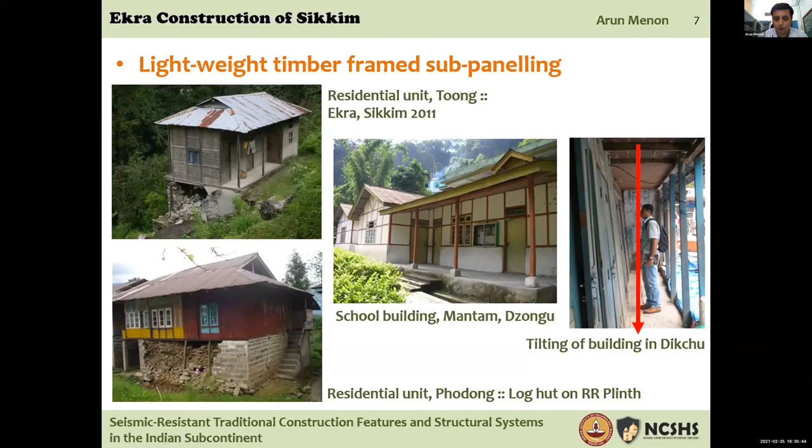Coming to a region I mentioned earlier, Gujarat, where the frequency of big earthquakes is close to 180 to 200 years. Therefore, there's always a question whether the traditional constructions there are really designed or deemed to be earthquake resistant, because of observations of good performance in recent earthquakes.

So we're looking at the Pols of Gujarat. Ahmedabad has a large number of them, and Ahmedabad has been declared a World Heritage City now. There's a difference between the type of earthquakes in the region of Gujarat versus those of the Himalayan area - the intraplate earthquakes in Gujarat versus the interplate earthquakes of higher frequency in the Himalayas.

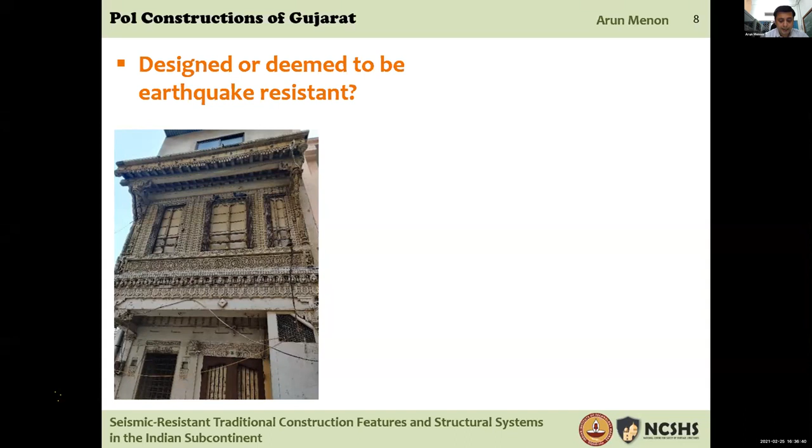This typology has received certain attention in recent years for its good performance in the 2001 Bhuj earthquake. I'm referencing two studies here, one in 2006 and one more recent in 2020 by Satvika Pancholi from CEPT University. The intent was to understand, when you don't have a very formal system following a local seismic culture not very evident in the construction, what is leading to good earthquake performance.

Her study identified that it's really the shear wall area, the shear walls and their area in orthogonal directions, the orthogonal connections that are introduced though not very systematically but present, the regularity in height - we're talking of multi-story constructions - and the state of conservation. The state of conservation plays a very significant role.

In today's context, this being a World Heritage Site with a number of these structures within the historic city, the question is, these are residences, how is the local population able to retain these structures despite an urge to make modifications or convert them into newer facilities? In this example, you could see a floor in reinforced concrete added above the original structure, or it might have been a replacement of a portion of the structure with new construction.

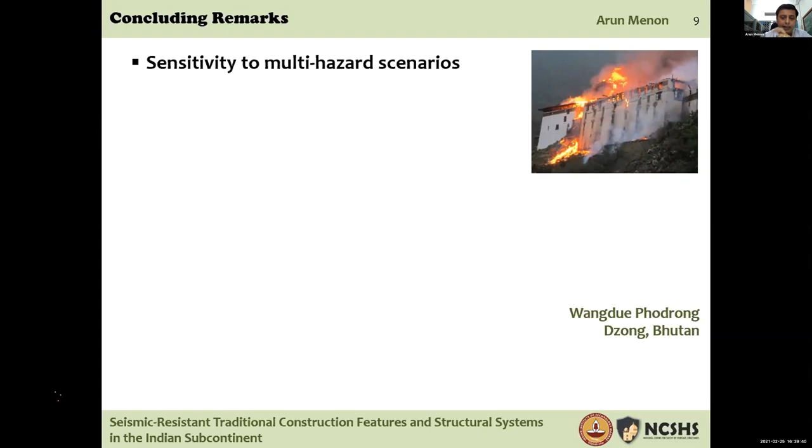One must also appreciate the fact that it is not heritage professionals or people working on preservation of monuments who mostly live in these constructions. Therefore, incorporation of new facilities, new services, new aspirations, changed lifestyles are aspects we really have to address. Of course, if it is a historical, protected monument, it's a different matter.

But when talking of heritage structures, widespread examples of heritage structures, we really must be attentive to the fact that new directions in terms of facility with services is a reality, and how does one address that?

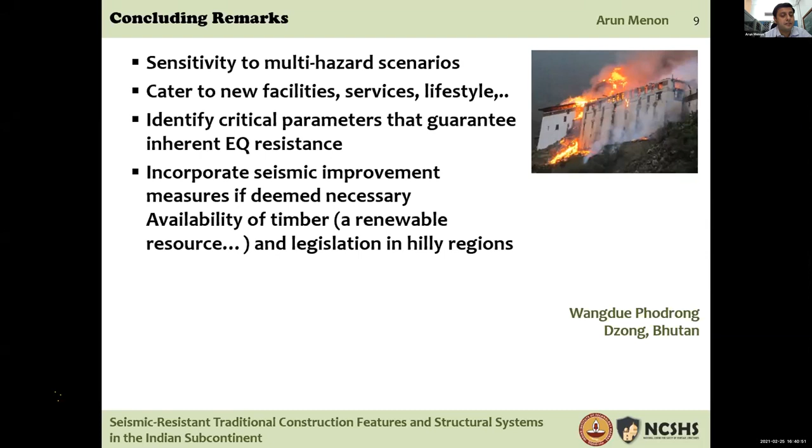It is in this context that one needs to identify critical parameters that guarantee inherent earthquake resistance, as we saw in the previous case of the pole constructions. We also, in certain cases, might have to incorporate earthquake resistant measures where deemed necessary. Timber, for example, availability is a problem in many places today, and there's also legislation in hilly areas that you cannot use timber. But one has to really look at the fact that timber is a renewable resource, and this is feasible.

Looking at the reconstruction happening at Wangdue Phodrong Dzong, incorporation of certain seismic improvement measures with reinforced concrete through stones is a fantastic example of trying to improve aspects of the structure which might have poor seismic performance. The same with the Chyasilin Mandap in Bhaktapur, which collapsed in the 1934 earthquake, was reconstructed with certain features incorporated, and survived the 2015 earthquake.

I leave it here. Thank you.

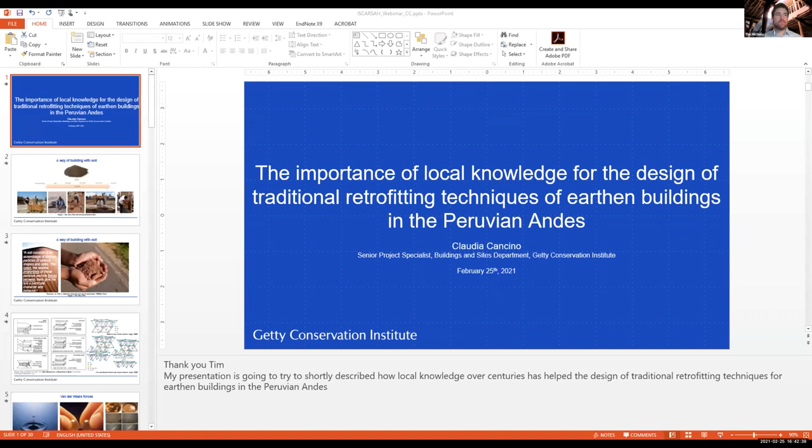My presentation is going to try to shortly describe, hopefully in 15 minutes, how local knowledge over centuries has helped the design of traditional retrofitting techniques for earthen buildings in the Peruvian Andes. I will use at some points some of the research, testing, and implementation developed as part of the Seismic Retrofitting Project to explain the efficacy of these ancient techniques.

I don't know why it's not, okay.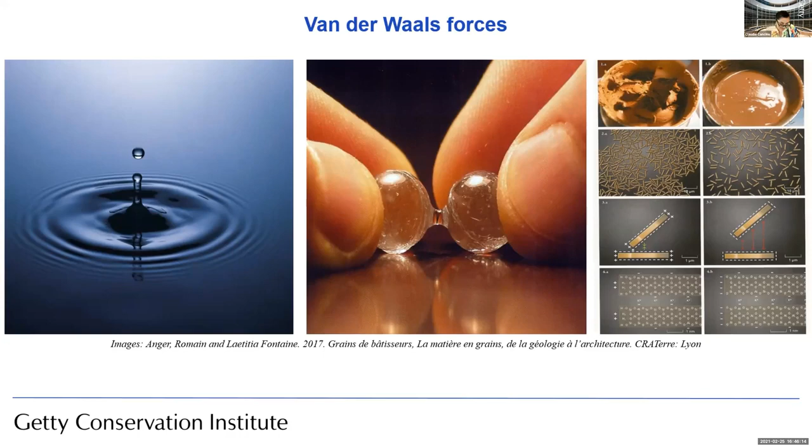Water, despite being portrayed as the enemy of earth construction, actually contributed enormously to its creation. For me, it is amazing that human beings went from playing around with these scientific principles to create a series of techniques that build impressive dwellings that are now World Heritage Sites and have survived over thousands of years. They are, for me, also a testament of how ingenious human beings are. The development of different earthen construction techniques around the world are basically based on the principles explained before.

Peru has a variety of buildings made with a series of earthen techniques that has evolved through time with the intention of standing against seismic forces.

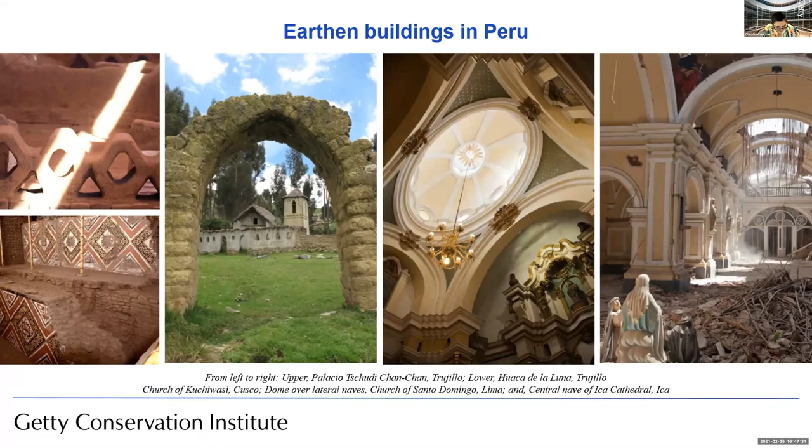There is evidence of potential seismic isolation at the archaeological site of Caral, constructed around 3100 before our era. Caral is considered one of the earliest urban settlements in the Americas and was built in stone and earth. Recently, engineers from the Pontificia Universidad Católica del Perú have researched a base isolation technique found in this ancient site, which apparently stopped the out-of-plane collapse of exterior adobe walls.

The use of the chicras, a vegetable fabric bag with gravel stones inside, apparently dissipates the energy of seismic events. This is an early demonstration of how ancient Peruvians made good use of available materials to adapt to earthquakes for centuries. You can find further results of the tests run at PUCP in several international publications, but in general, it has been proved that the chicras actually help to dissipate the seismic energy and preserve these ancient sites.

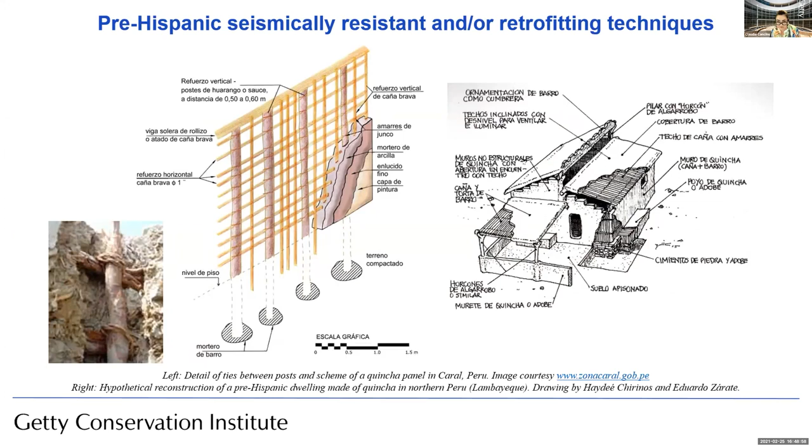I am not sure if the use of different materials as part of an isolation technique was also applicable for the construction of the famous Peruvian Andes sites, which flourished during the Inca period from the 12th to the 15th century of our era. I guess further investigation should be done, particularly if you consider that one of the most significant sites in the seismic region was constructed with unreinforced stone masonry over a series of man-made andenes and is still in place.

Several archaeologists have also noticed the use of reinforcements at the end of the wooden elements of hypothetical roofs at the dwellings at Machu Picchu. This tradition of tying the ends of the wooden beams to the masonry walls was later used for the construction of roofs during the Spanish viceroyalty.

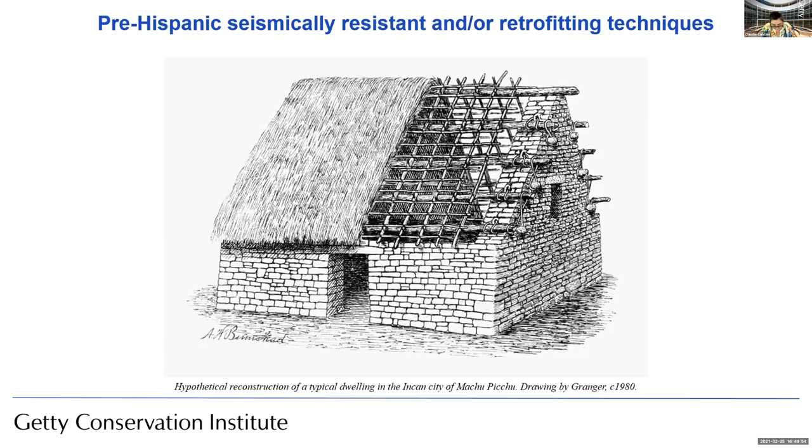However, many centuries before the construction of Machu Picchu, the coast of Peru was full of a series of large earthen complexes built either in adobe, like the Huaca Huantille in Lima, or rammed earth or tapial, as we call it, like the site of Cajamarquilla.

The Spanish arrived in 1532, and in 1536, there was a document called the Real Provisión that ordered the construction of good houses for the Indian population of the Viceroyalty of Peru. The Regulation of Madrid, published in 1565, stipulated that structural walls in houses have to be built in rammed earth or tapial, a construction already used in the Iberian Peninsula.

The first documented earthquake happened in October of 1606, and it apparently damaged several buildings in Lima. A second earthquake, later in 1609, made the municipality of Lima, at the time Cabildo of Lima, suggest reducing the height of the buildings and studying traditional construction techniques already developed by the Indians, like the quincha and the adobe.

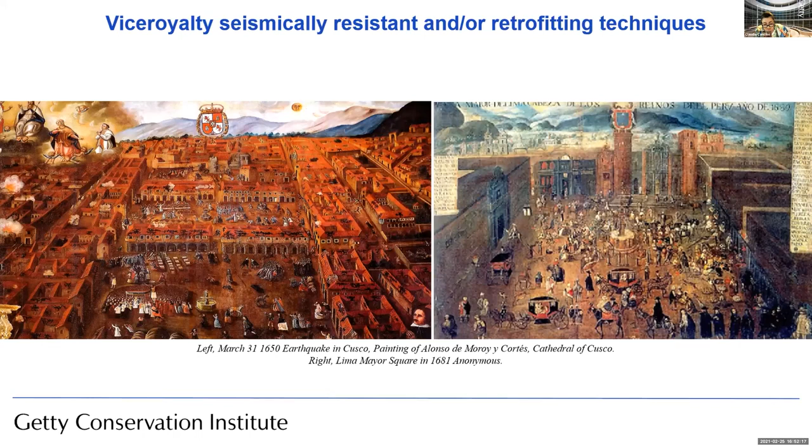Later, the technique was modified, and I want to mention here that this technique is very similar to some techniques that Gorun has shown you in Anatolia, as well as Arun has shown us with the ekra system in India. For me, it's still impressive that in different parts of the world you can find similar construction techniques.

They were changed over time, as I said. For example, the panels in the second floor had adobe fillings in the lower part of the panel, and we call this section citeras. They did this probably to better connect the panels with the wall below, while the third floor in some cases had wooden diagonal posts at the corners, probably to avoid overturning.

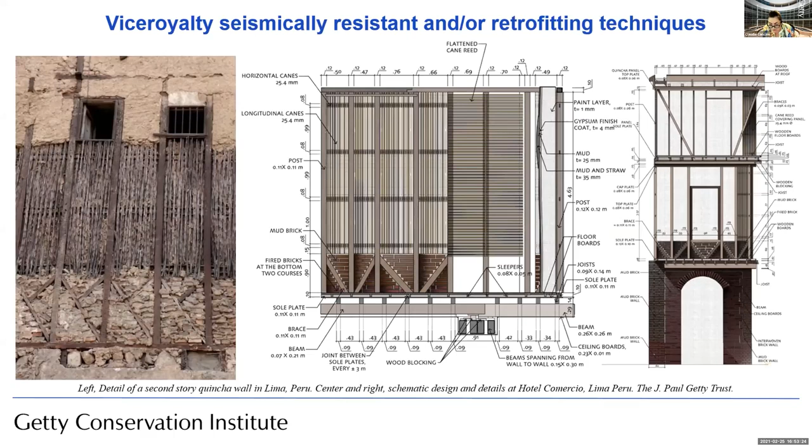It seems it was after the dome of Santo Domingo was constructed and survived an earthquake that the famous roofs of the San Francisco convent in Lima were constructed. Nowadays, all the Viceroyalty churches of the coast of Peru are built with this system, including the construction of wooden columns and pillars like the ones found at Ica Cathedral, as well as the Cathedral of Lima.

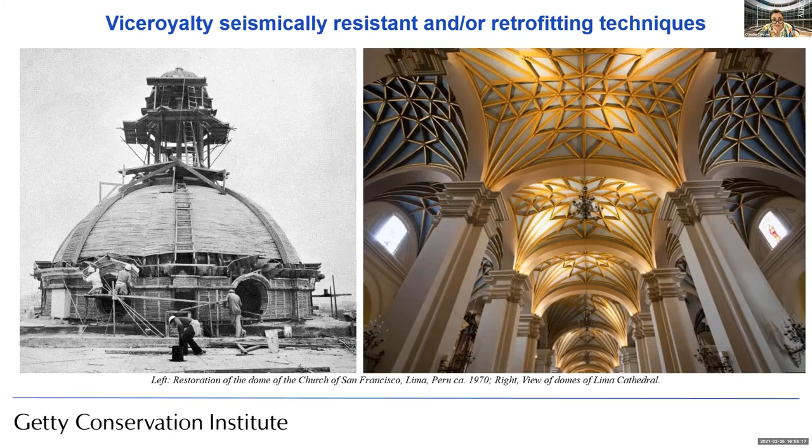In 1746, there was another earthquake with its epicenter in Lima, and around 3,000 churches and houses collapsed.

Godin, in an official document, suggested to the Cabildo the mandatory use of earth, cane, and adobe instead of lime, brick, and stone as construction materials, the use of quincha for wall partitions, and the use of quincha walls for the construction of the second and third stories of residential buildings.

Godin also suggested increasing the width of adobe walls, and finally, the construction of buttresses against church adobe walls. The buttresses have proved to be a very efficient retrofitting solution, stopping particularly the overturning of walls, and can be seen in most of the earthen churches in the Andes, but also in some of the rural churches of the coast of Peru.

At some point, the arch that normally divides the nave from the altar of these churches was changed from stone to quincha as well. However, I have not been able to find exactly after which earthquake this tradition was changed.

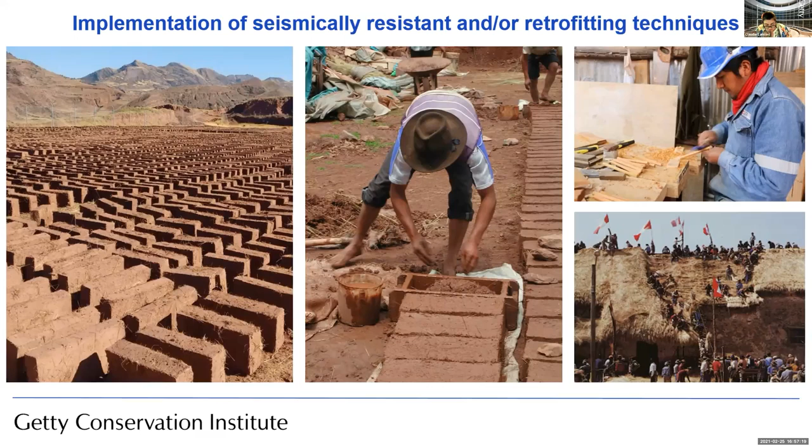As you can see, the tradition of building with earth has continued over centuries in Peru, and it's still very much in use. Now not only are masons training on the job, but the teaching of earthen construction and conservation is part of the curricula of architecture and engineering schools. This has been an advantage for the conservation of earthen sites.

There is a lot of experience implementing conservation projects in Peru, taking into consideration seismically resistant and retrofitting techniques developed through time. You can see in the video the reconstruction of the Quincha arch at the Church of Kuño Tambo, an SRP implementation project in Cusco, as well as installation of traditional wooden tie beams. The use of key tie connections found in the Inca dwellings at Machu Picchu have always been used, but the quality of the techniques has changed over time.

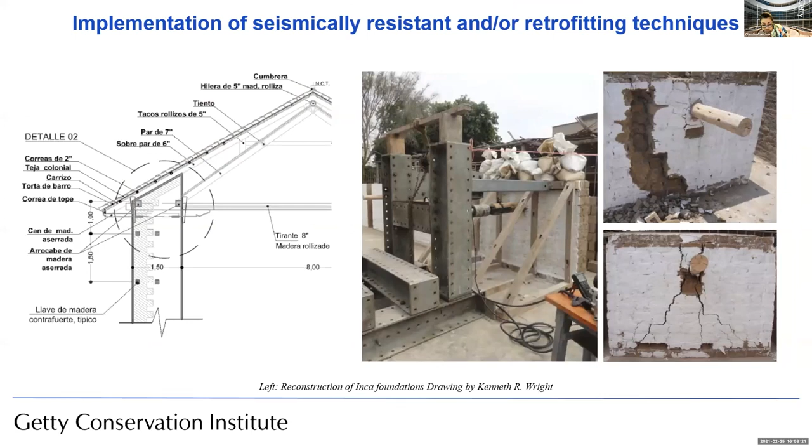A very detailed design of the key tie connections was developed as part of the implementation project at Kuño Tambo. The Pontificia Universidad Católica also ran a series of tests to understand the performance of tie beams on these types of churches. The installation of wooden corner keys to avoid seismic damage at wall intersections appeared at some point during the Republican period. The use of these retrofitting techniques within a conservation project started formally probably during the 70s, and I was surprised that this type of corner key was also presented by Grigor in previous presentations.

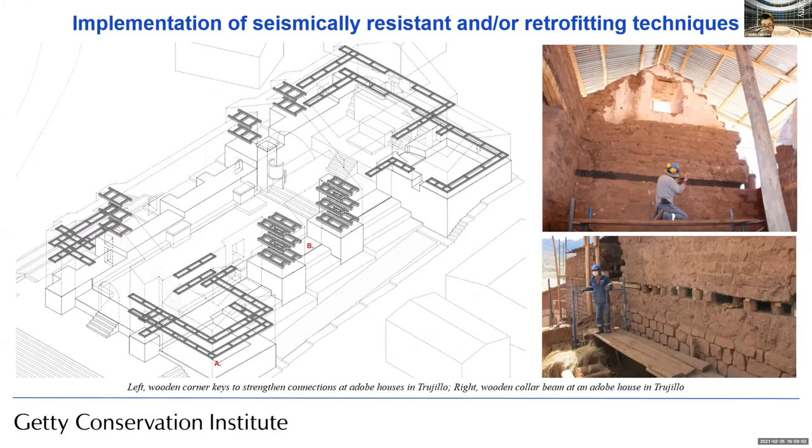For the Church of Kuño Tambo, a series of wooden corner keys and collar beams were designed, modeled, and implemented based on the construction expertise of our Peruvian colleagues. The study of the material and structural characterization, as well as the modeling of these techniques, has been published as part of the SRP and can be downloaded from the Getty website.

Similarly, the retrofitting proposals for two historic earthen sites in Peru are presented there, so you can see in more detail the development of the conservation project. I have mentioned that the Pontificia Universidad Católica de Peru has worked with us as part of this project, but I would also like to mention that the University of Minho in Portugal developed the modelings, and we have worked in close collaboration with the Ministry of Culture in Peru.

It is very difficult to tell a linear story that explains the development of seismically resistant construction techniques in Peru. I would say it has always been a combination of local knowledge, professional expertise, and trial and error after earthquakes. Nowadays, Peruvian colleagues keep working on the further development of building norms and codes to better preserve these magnificent earthen sites. Thank you so much for your attention, and I hope you found this presentation interesting. Thank you.